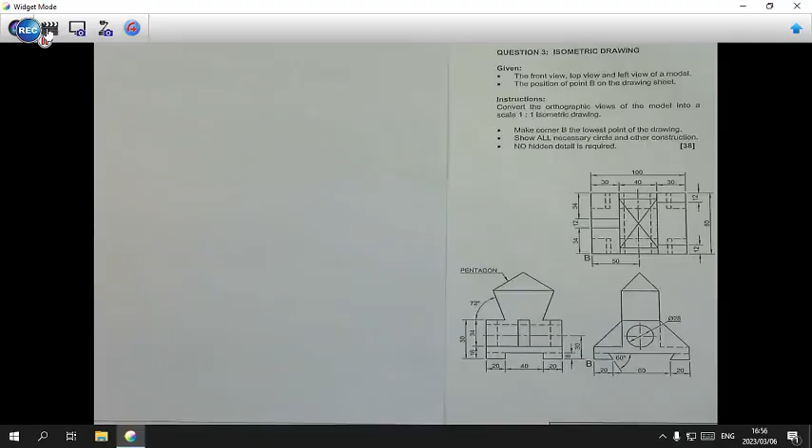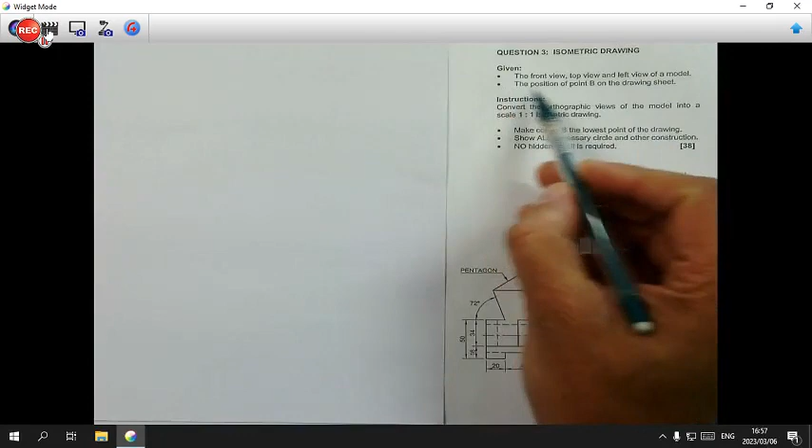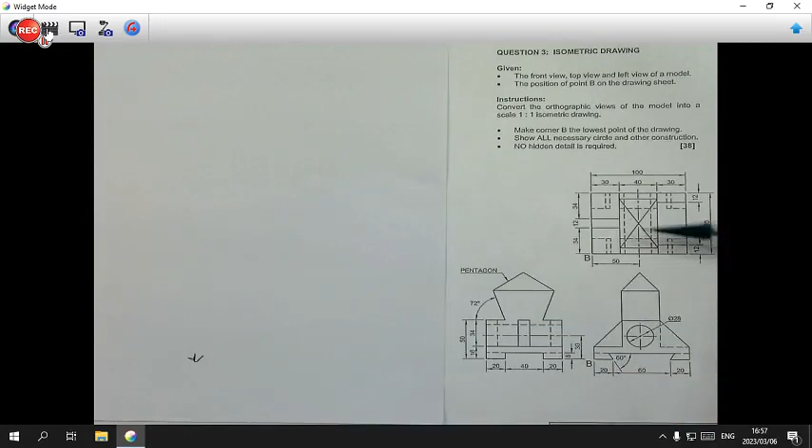Grade 11s, we are focusing on this particular isometric drawing where you are given the front view, the top view and the left view of a model, and you are also given the position of point B. So here we are looking at your front view. That is going to be your top view, which is directly above your front view, and this view being on your left hand side is going to be your left view. So front, top and left.

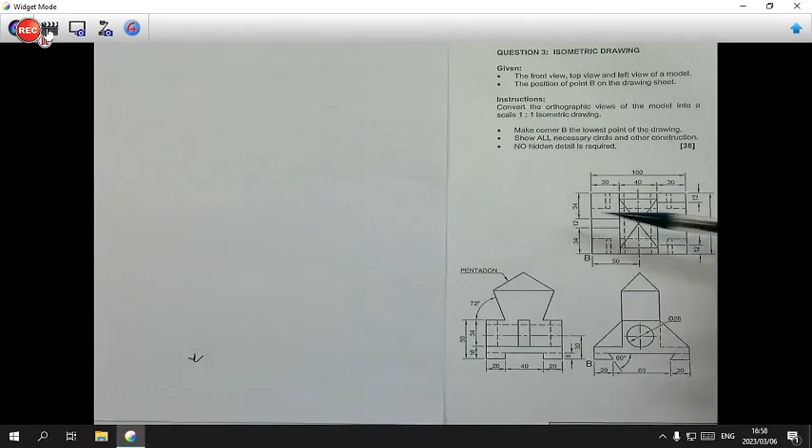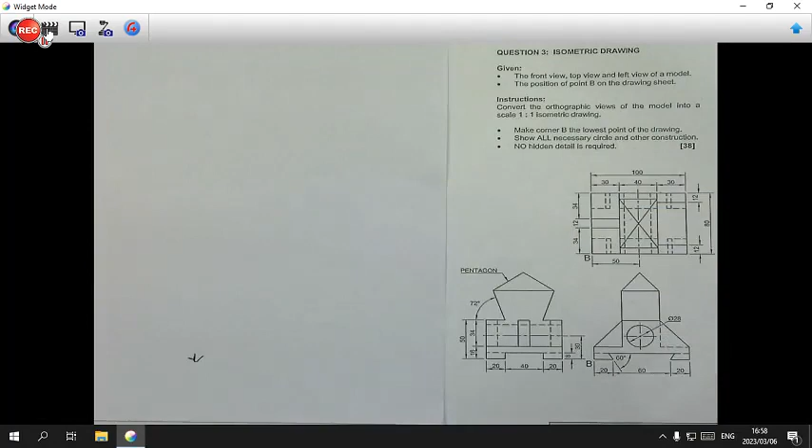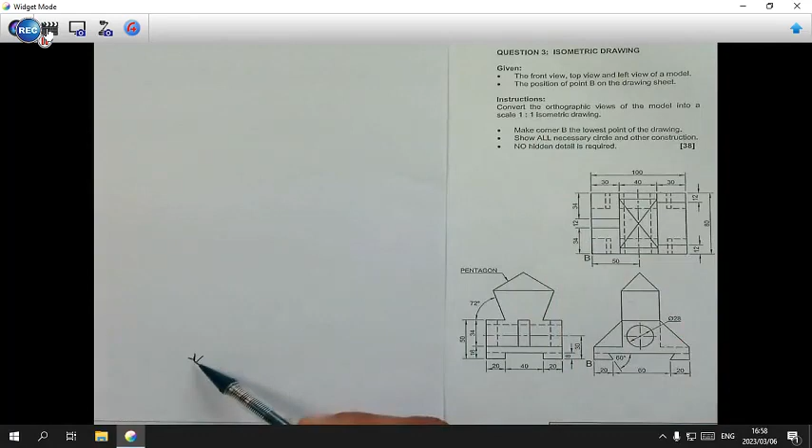The instructions are very clear where it states that you need to convert this particular drawing in the different orthographic views of the model into a scale 1:1 isometric drawing. So you need to convert 2D to 3D. There are special conditions. You need to make corner B, which is this corner over here as well as that corner over there from the top view, your lowest point. So you're going to start with that right over here. And then of course, you need to show all the necessary constructions of the circle as well as all other constructions of the drawing. No hidden detail is required.

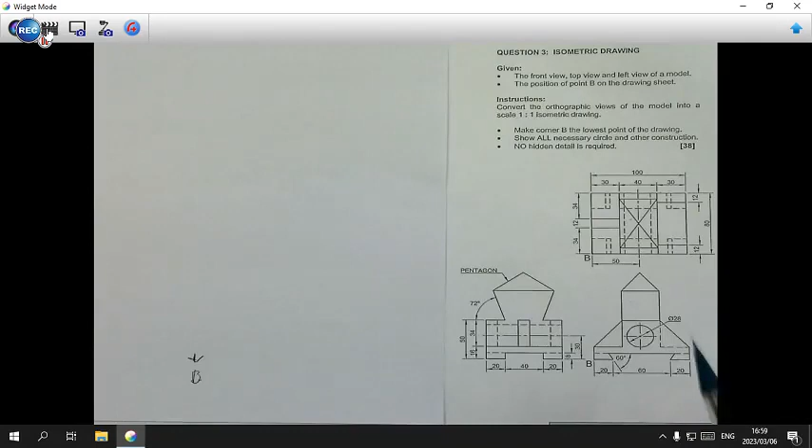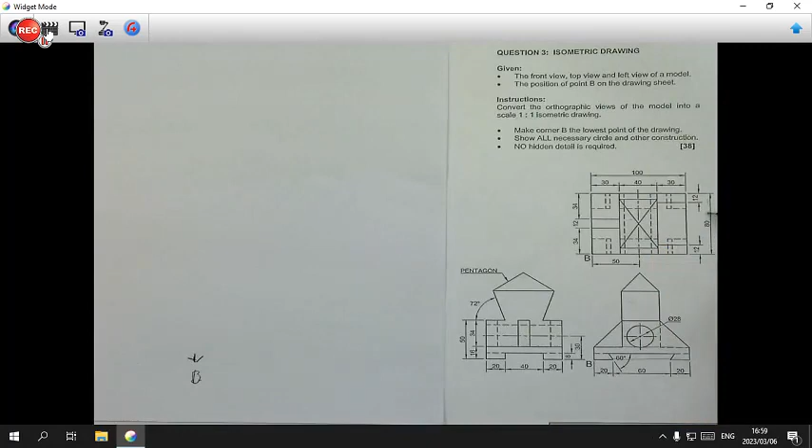So just for planning purposes, I want to take you through this drawing as to how you need to approach this particular isometric drawing. There are different parts in which I want to break up this drawing. I'm going to break this up into a base part here, that bottom base section, which has a height of 16 and a length of 20 plus 60 plus 20, which is going to be 100. As you can see, it appears there. Then it has a width of 80. So that's very important to understand. And then it has this shaped area here of which an angle of 60 degrees has been given to us.

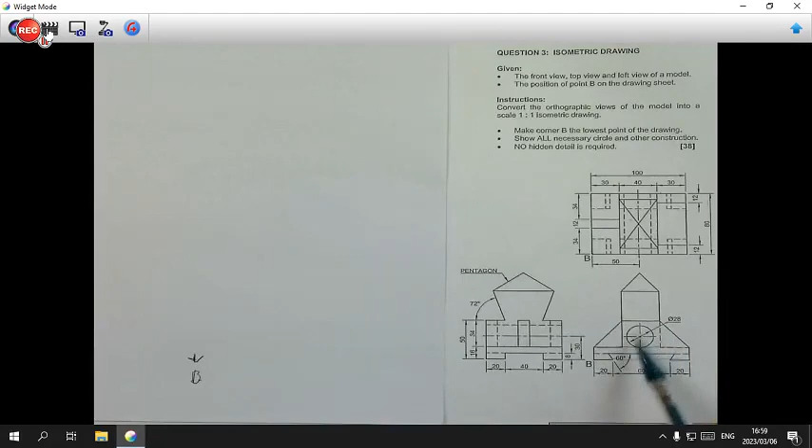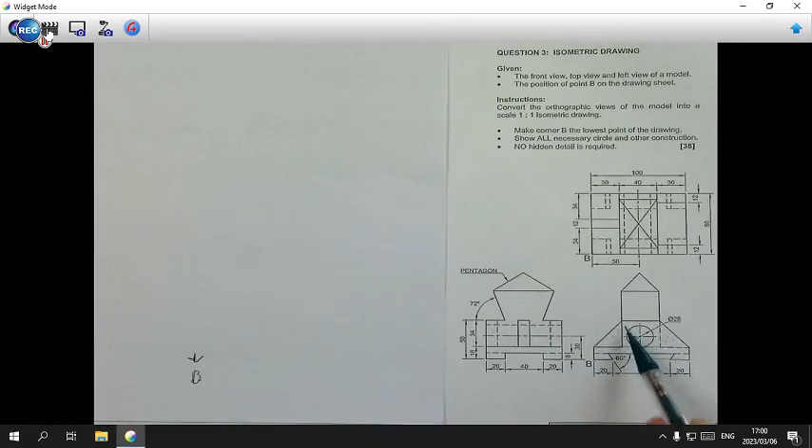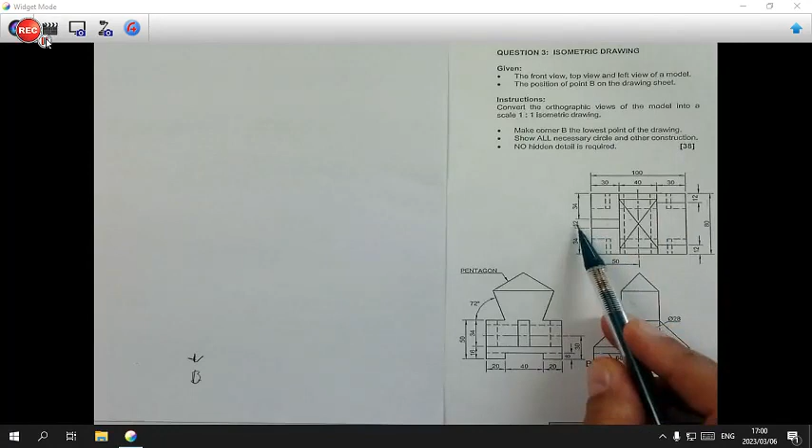Then on top of that, I'm going to draw this box that I have here. And later on, I will include the hole that runs right through. On the sides of this box, I'm going to have these two components, webs or ribs, for reinforcement of this middle section here, both on the sides, which will be indicated on the drawing. Keep in mind that this one here is a thin part of 12 millimeters, and this part here is an insert which has been shown with the dash line, meaning that there are two of these webs on both sides of this particular drawing here.

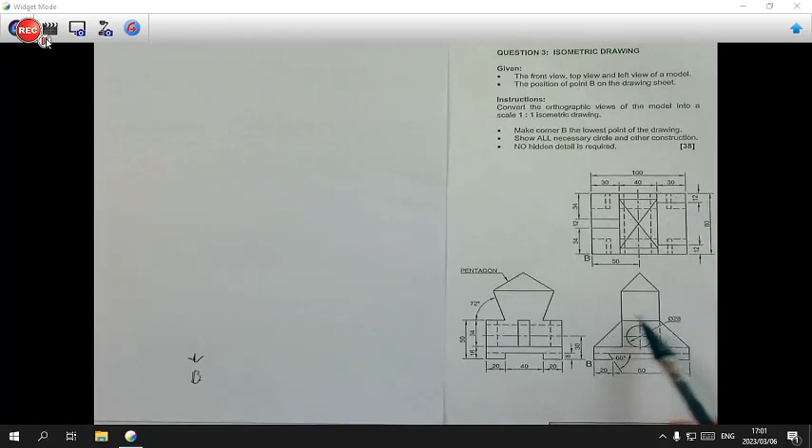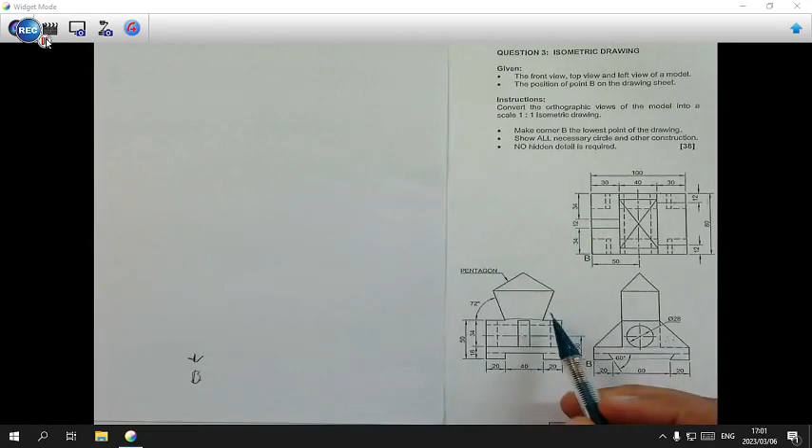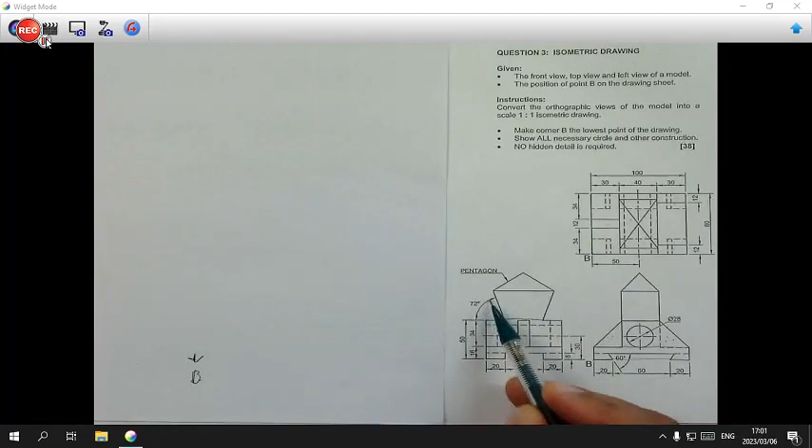Then of course we are going to put in the top part, which is the second last part of our drawing. And keep in mind that this is the shape of a pentagon. Right, and then finally we're going to include the hole. There will be two parts that will be drawn as auxiliary views, and that is going to be this part over here, which is the 60 degrees, and that part over there, which is the 72, which forms the pentagonal shape. Let me explain very briefly what you need to do.

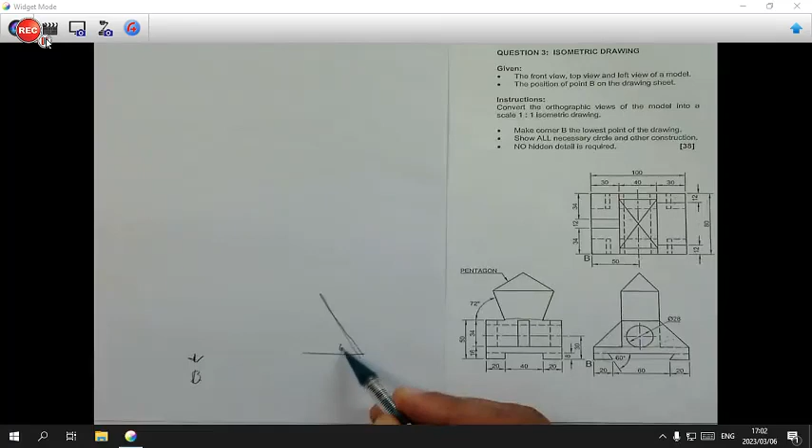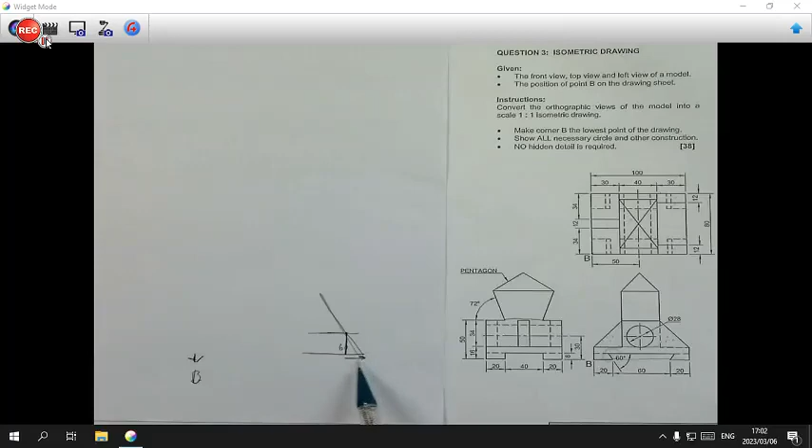So you are going to take that specific area here and you're going to draw a line like that, which replicates this line over here. You're going to have an angle of 60 degrees running like that. You will of course have the height of that, which is going to be 8 millimeters. So you're going to measure up 8 millimeters there, and you're going to draw a line. And wherever this line crosses there, you have to have a line that's perpendicular directly down onto this line, which is going to give you that specific size over here. So you know that this is a 60 degree angle. There is a height of 8 over here, and that is going to be X, which you're going to measure when you draw it formally.

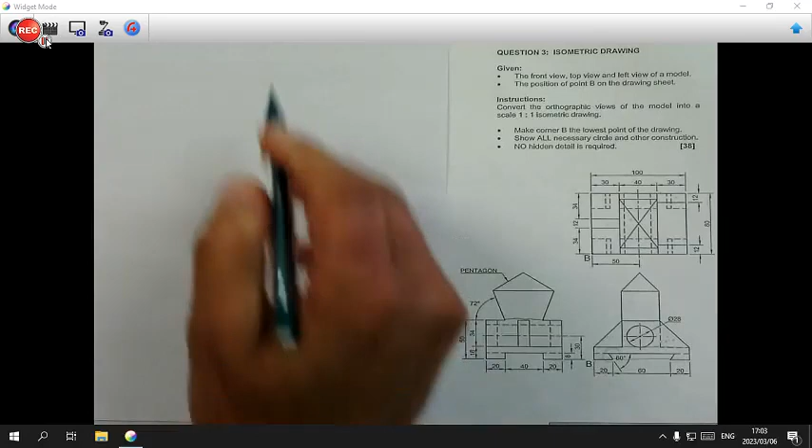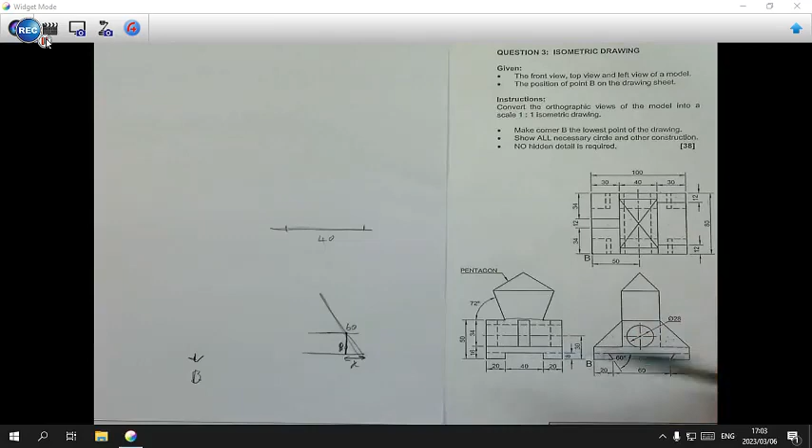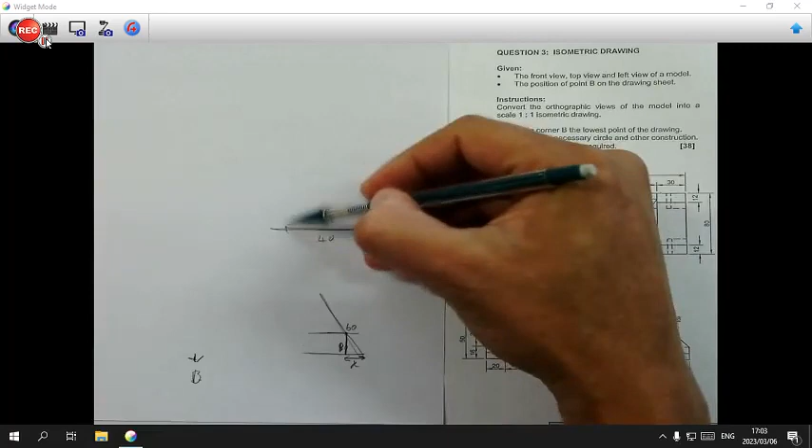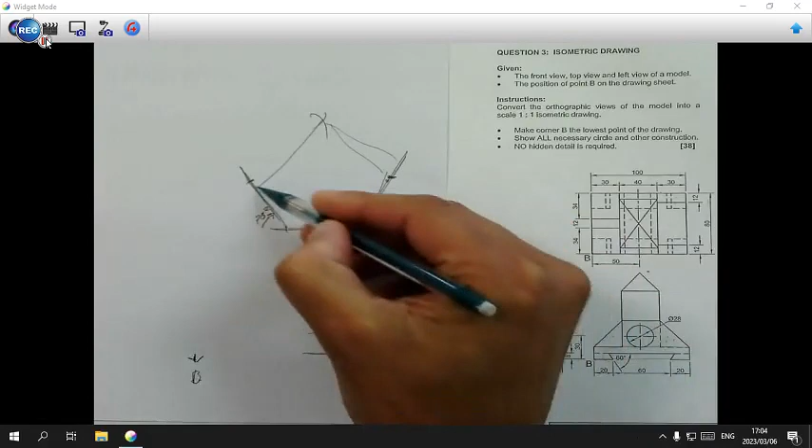And then the second auxiliary view, which you're going to draw in a blank space, is the pentagonal shape. So you're going to start with a base over there, and you know that you need to find one length, and one length in this case equals 40 millimeters, which we're going to mark over there. That's 40, and you will find that directly linking up here, the 40. And then you are going to put your protractor here and measure 72 degrees, which is your outside degree, and draw a line. You're going to measure 40 on here and another 40 on there. Use your compass to arc this side and that side, and then to have this here as your pentagonal shape. You're of course going to draw a line in the center there.

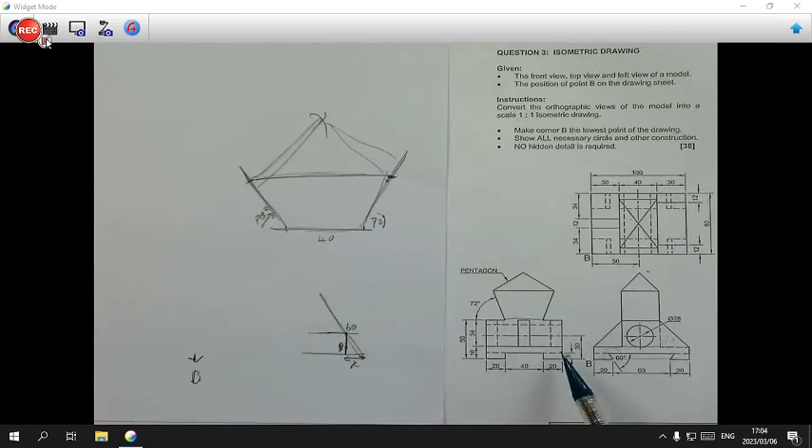So that shape and this part here are two very important auxiliary views which you need to be doing beforehand so that you can implement them into your drawing when required. And learners, keep in mind that you always have to do an auxiliary view once you are faced with a degree dimension on your isometric drawing.

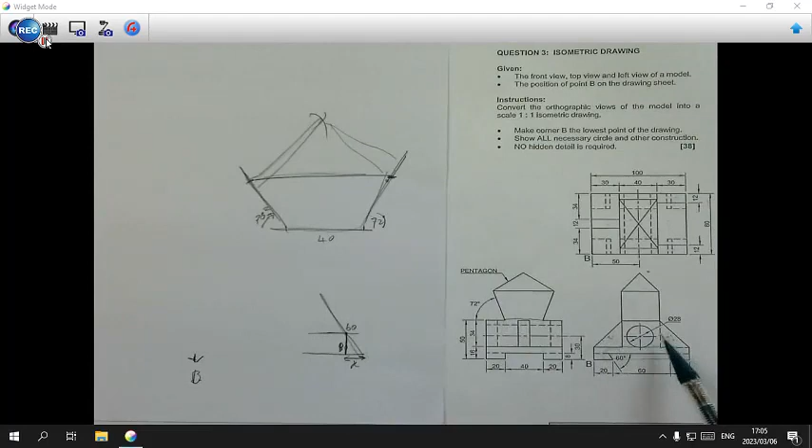So when I start, I'm going to draw these two components first in a blank space, and then I'm going to do this part over here, which is my base, add that part on top of my base, add my two webs on both sides. Just keep in mind that there are two here on this side and one on that side, which is in the center. I'm going to add my pentagonal shape on top, and then I'm going to end it off with that circle that I have there. So it's quite a tricky drawing. Watch carefully how the drawing unfolds part by part.